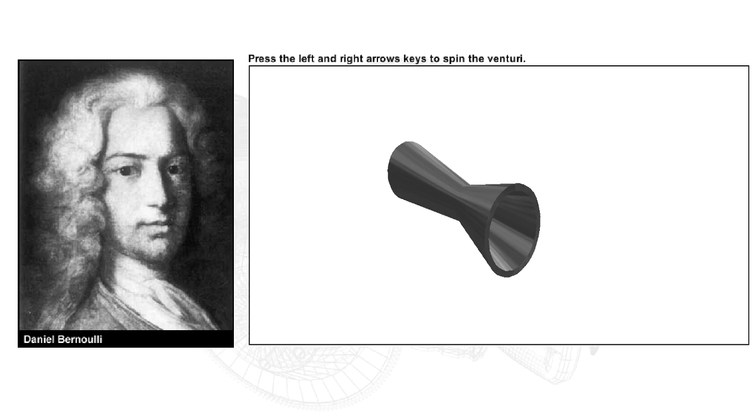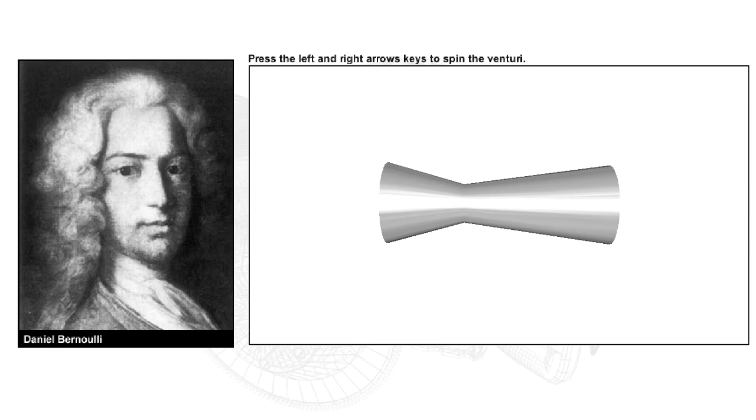If we just consider airflow as opposed to any other fluid or gas flow, the potential energy in that airflow can be assumed to be constant. Thus, we can modify the previous statement for all practical aerodynamic purposes by saying that the kinetic energy plus the pressure energy of a smooth flow of air is always constant. Thus, if the kinetic energy is increased, the pressure energy will drop in proportion so as to keep the total energy constant.

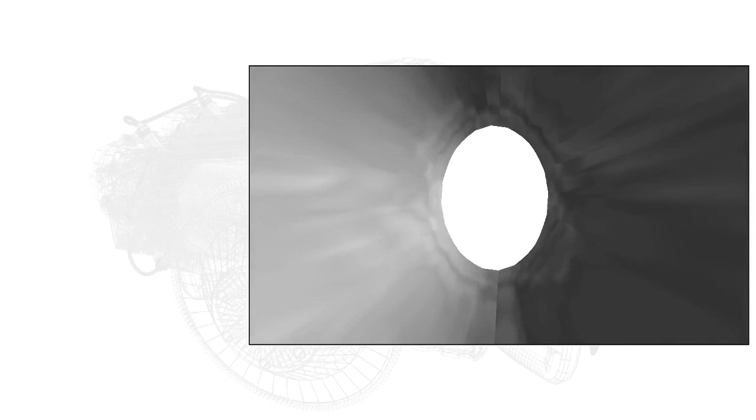A practical application of Bernoulli's theorem with which the pilot should be familiar is the Venturi tube, sometimes called a convergent-divergent duct, an example of which is shown here. The Venturi tube has an inlet which narrows to a throat, and an outlet section, relatively longer, which increases in diameter towards the rear.

For a flow of air to remain streamlined, the mass flow passing a particular point in a set period of time must remain constant. So, if a Venturi tube is positioned in such an airstream, then, for the air to remain streamlined, the mass flow through the Venturi must remain constant.

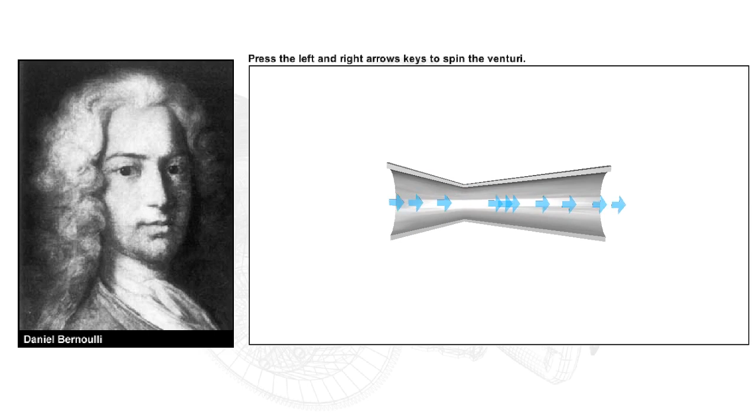The mass flow is dependent on the area times the density times the velocity, and is a constant. This statement is known as the continuity equation.

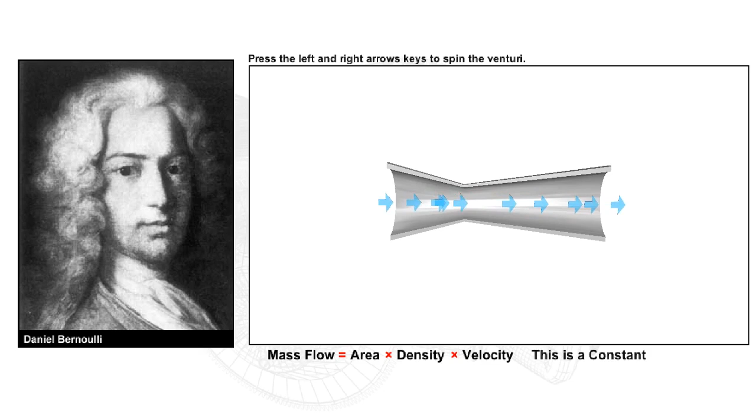Assuming that the density remains constant, for the mass flow to remain constant and still pass through the reduced cross-section of the throat of the Venturi, the speed of flow through the throat must be increased. Bernoulli's theorem states that this will bring about an accompanying pressure and temperature drop.

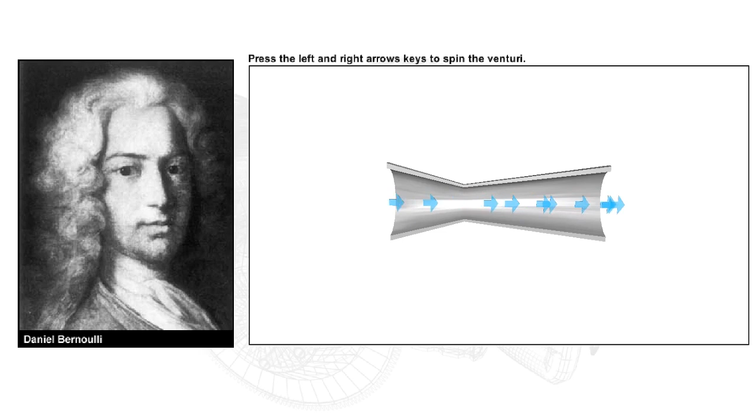Gases behave differently from the other two commonly studied states of matter, solids and liquids, so we have different methods for treating and understanding how gases behave under certain conditions. Gases, unlike solids and liquids, have neither fixed volume nor shape. They are moulded entirely by the container in which they are held.

There are three variables by which we can measure gases: volume, pressure, and temperature. We'll discuss two of the so-called gas laws which are most pertinent to the operation of the internal combustion engine: Boyle's law and Charles' law.

Robert Boyle was born in 1627 in Ireland. He made important contributions to physics and chemistry, but is best known for the law which was named after him concerning an ideal gas.

Boyle's law states that, in a gas which is held at a constant temperature, the volume of that gas is inversely proportional to its pressure, or pressure times the volume equals a constant. This holds true where P is the absolute pressure of the gas, and V is the volume occupied when the pressure is P.

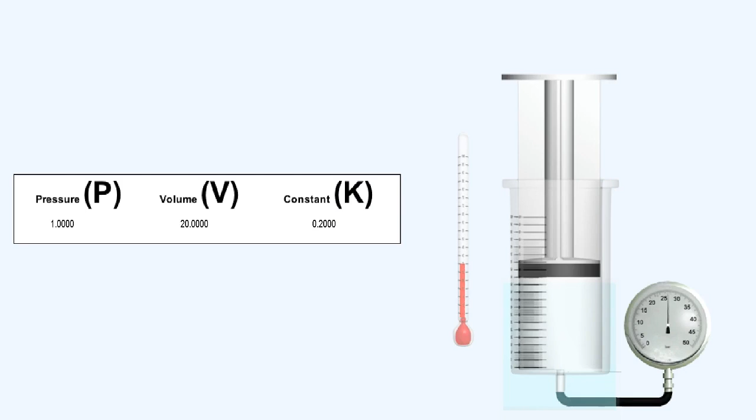This is a reproduction of an experiment carried out by Boyle. He had a calibrated syringe filled with air and deduced its volume. While taking care to retain the temperature of the air inside the syringe constant, he increased the pressure and decreased the volume inside it by placing weights on its plunger, taking readings as he did so.

You can see that by multiplying the volume by the pressure, the answer remains a constant. Hence, the product of the absolute pressure and volume of a given quantity of gas is constant as long as the temperature of the gas does not change.

Try moving the plunger up and down yourself to simulate changing the weight on it, and note that the result of P times V always remains a constant.

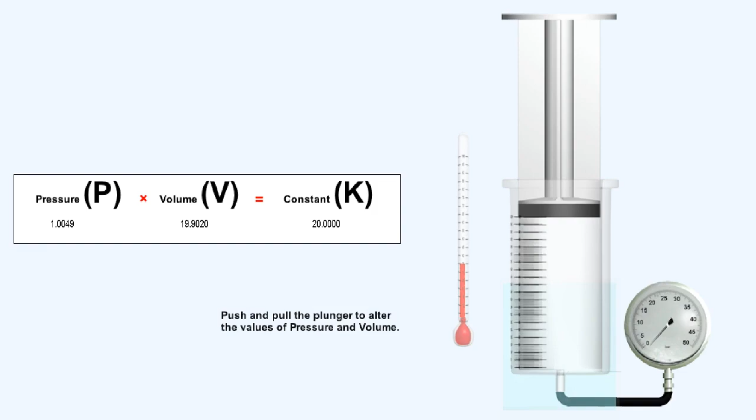Because of the interest in hot air balloons in the early 1800s in France, Jacques Charles and Joseph-Louis Gay-Lussac made detailed measurements on how the volume of a gas was affected by its temperature.

Just as Robert Boyle made efforts to keep all the properties of the gas constant except for the pressure and the volume, so Jacques Charles took care to keep all properties of the gas constant except for its temperature and volume.

Charles' law, or Gay-Lussac's law, states that if any gas is held at a constant pressure, its volume is directly proportional to the absolute temperature, or, stated as a formula, the volume divided by the temperature is a constant.

Just as we did to demonstrate Boyle's law, we'll replicate an experiment similar to one carried out by Jacques Charles.

If we partially fill a calibrated syringe with air and place it in a container of water, then by increasing or decreasing the temperature of the water, and thus the temperature of the air inside the syringe, while taking readings of volume and temperature in degrees Kelvin, and dividing volume by temperature, we see that the answer is a constant. Remember that, in theory, the pressure inside the syringe remains constant also.

Try changing the temperature of the water for yourself, and notice that the result of the volume divided by the temperature remains a constant.

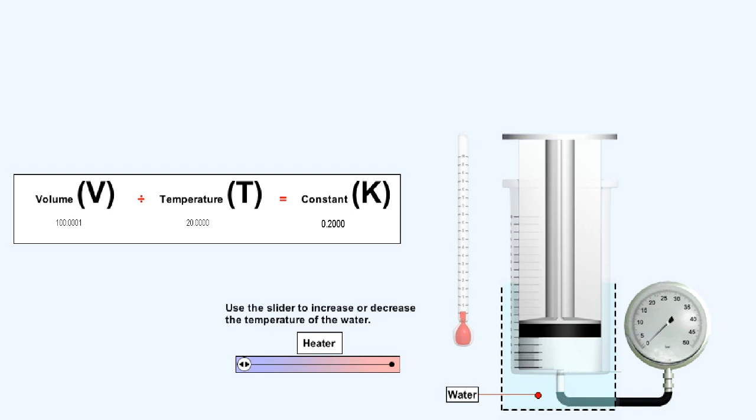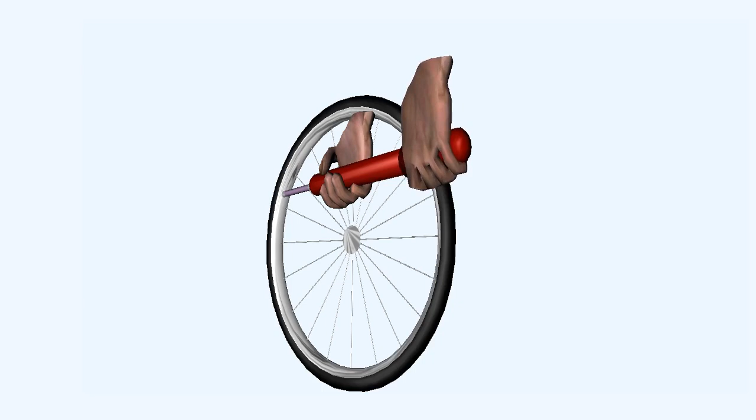Although both Boyle's law and Charles' law work in theory, we are unable, with existing technology, to make them work in practice. For instance, it's impossible as yet to increase the pressure of a gas without increasing its temperature, because of the adiabatic heating which inevitably occurs.

Remember the example which is consistently quoted of how a bicycle pump always heats up when air is pumped into a tire.

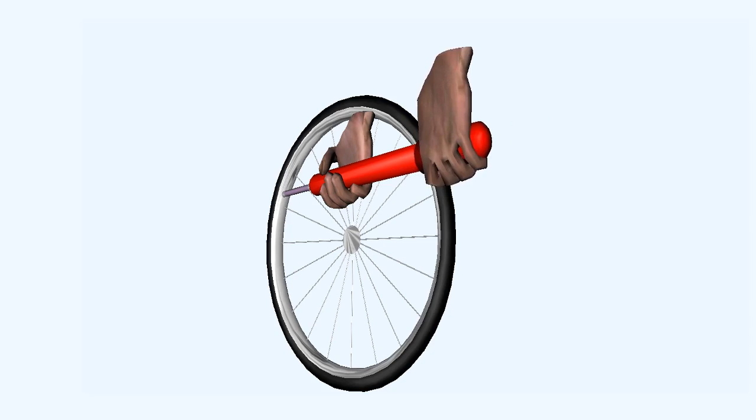By using Boyle's and Charles' law together, we get a practical method of determining what is happening to the gases inside the internal combustion engine, where temperature, pressure, and volume are all changing constantly.

With the scientists' usual lack of imagination, they've named the integrated Boyle's and Charles' laws the combined gas law.

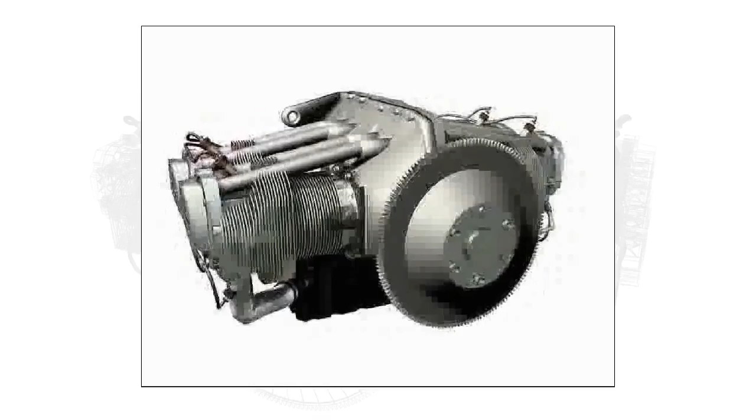The combined gas law represents the relationship between volume, pressure, and temperature. This relationship indicates that for any two given conditions within the engine, which we may label condition 1 and condition 2, pressure times volume divided by temperature is a constant. This is commonly shown as P1 times V1 over T1 equals P2 times V2 over T2.

The changes in pressure, volume, and temperature within the engine cylinder as the piston moves between the top and bottom of its stroke are illustrated in the following animation of a purely theoretical engine. In a practical engine, both the valve and ignition timing have to be radically changed if the engine is to have any chance of running at all.

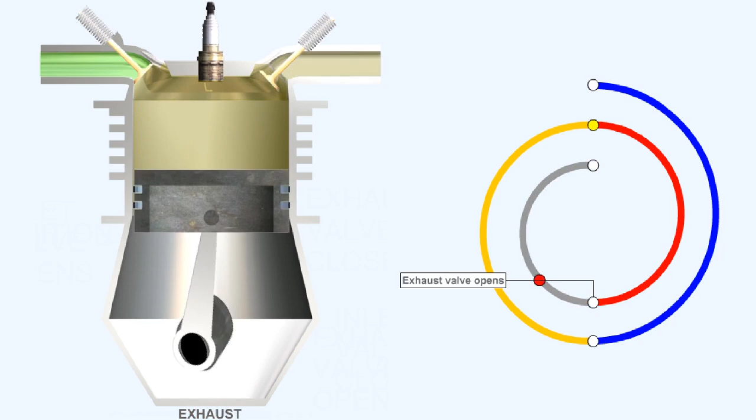On the induction stroke, the piston moves down, increasing the volume available for the incoming mixture, and the pressure inside the cylinder thus reduces.

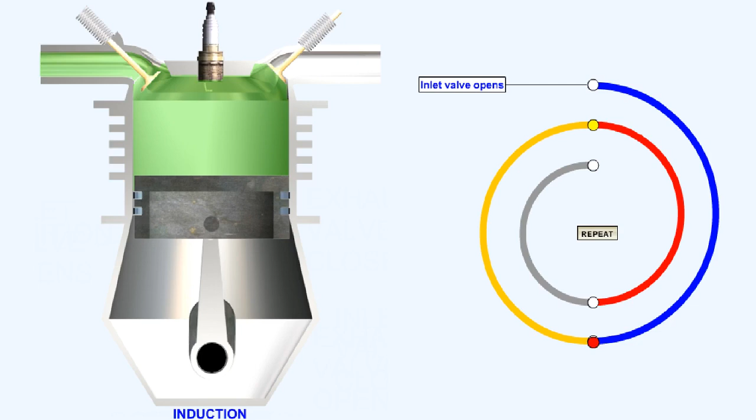On the compression stroke, the cylinder volume is reduced. Because both the inlet and exhaust valves are closed as the piston rises, the pressure inside the cylinder increases, as does the temperature.

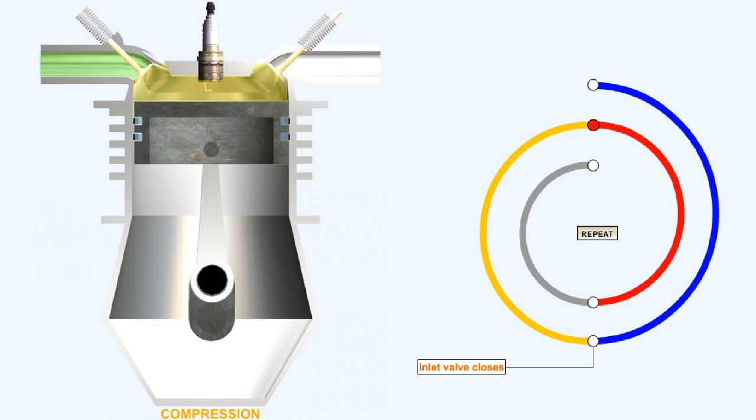In this theoretical engine, combustion is assumed to occur instantaneously at top dead center. Because of this, the engine is said to be a constant volume engine. However, as we shall learn later, in the practical engine, combustion actually occurs relatively slowly.

The power stroke in the theoretical Otto cycle starts with the mixture being ignited and simultaneously burning with the piston at top dead center. The resulting initial rapid rise in temperature expands the gases, increasing the pressure in the cylinder, driving the piston down. Subsequently, as combustion ceases, the volume of the cylinder increases, the pressure will fall, and with it the temperature.

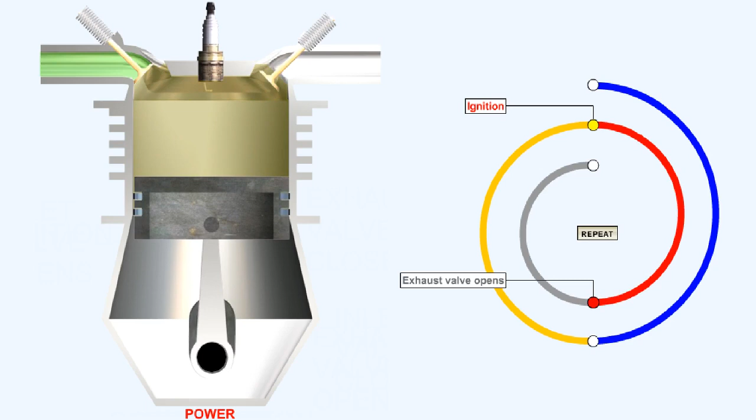On the exhaust stroke, momentum keeps the piston moving. As it rises, the volume inside the cylinder decreases, and even with the exhaust valve fully open, the pressure will rise slightly as the piston ascends to expel the gases to atmosphere. This will cause the gas temperature to increase slightly.

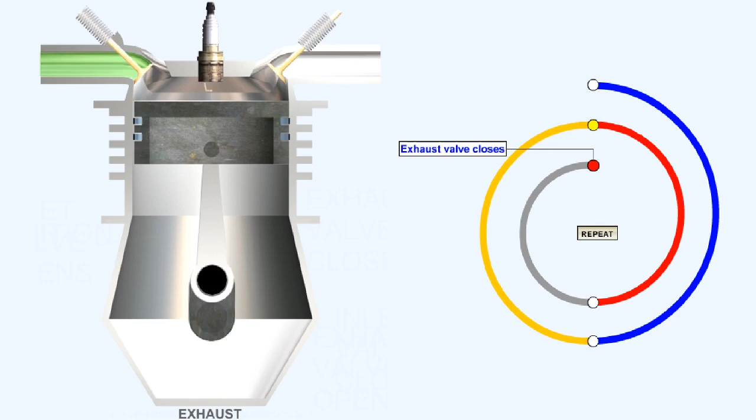This is the end of the first sortie into the mysteries of the internal combustion engine. In the next lesson, we'll investigate a few more definitions and then delve a little more deeply into the way the piston engine is built.